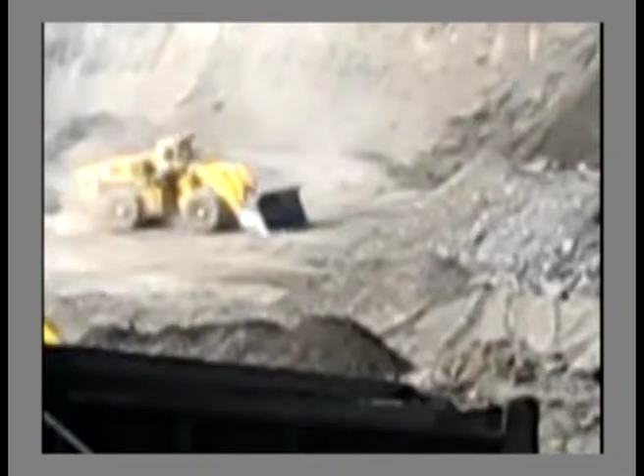Module 1. Methane is a gas formed as a part of the process of coal formation. When coal is mined, methane is released from the coal seam and the surrounding disturbed rock strata. Methane can also be released as a result of natural erosion or faulting. The methane content in coal seam generally increases the deeper the seam exists and also with its age.

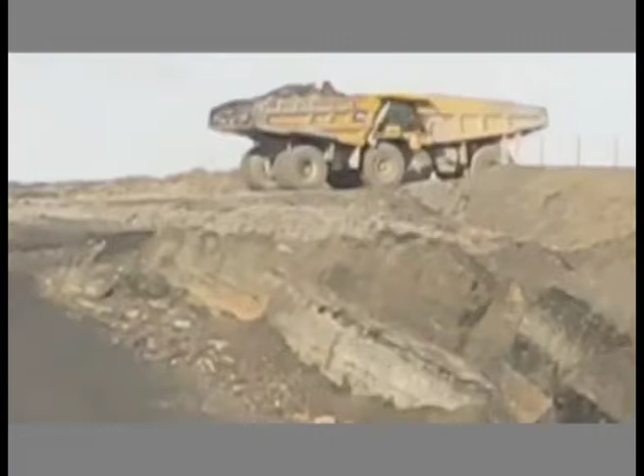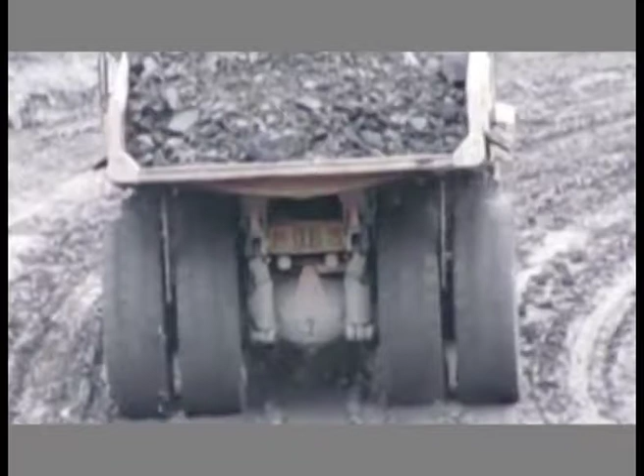As the depth of the coal seam increases, so does the pressure level. This in turn reduces the level of permeability, causing methane to be much more tightly bound to the coal and surrounding rock strata. Underground mining can therefore produce substantially greater levels of methane than surface mining. In fact, underground mines account for the overwhelming majority, up to 90%, of all methane emissions from the coal sector.

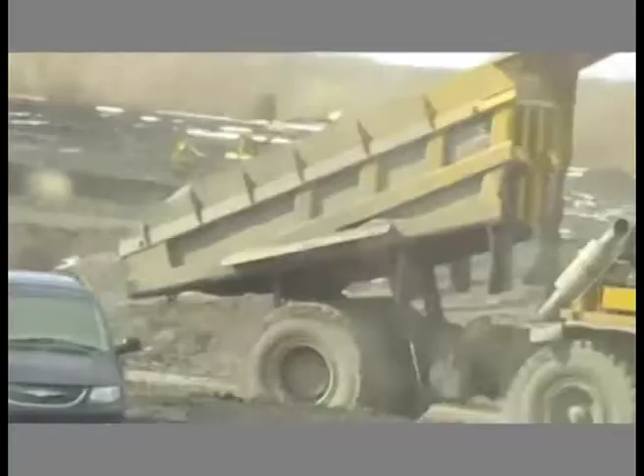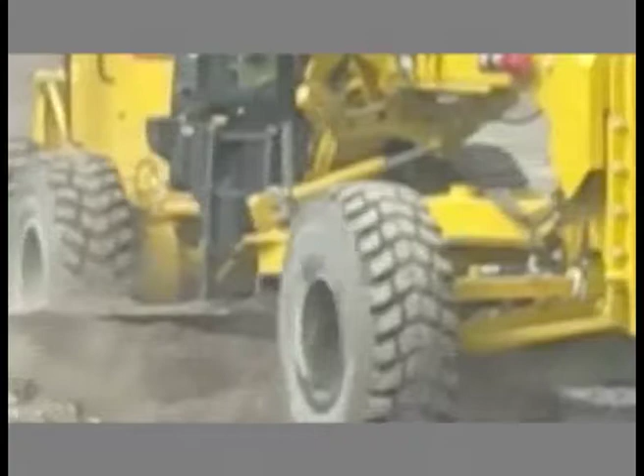When coal is mined underground, this methane not only becomes a potent source of pollution and accident by way of explosions, but also it adds to the ventilation cost. Furthermore, it adds to the volume and quantity of GHG, that is greenhouse gases, when exhausted from the underground into the surface atmosphere.

Thermal power plants are the single largest stationary source of pollution in any country. The toxins these coal-fired power plants produce cause severe damage to both human health and the environment. This in turn lowers the quality of life. Additionally, it also exerts severe adverse impacts on the wildlife, aquatic life, plants and trees, etc.

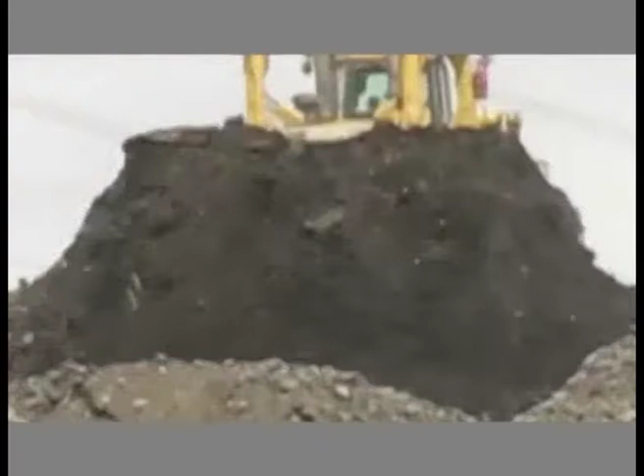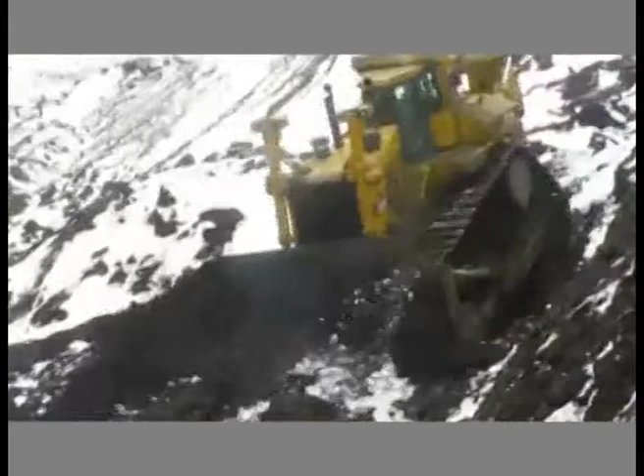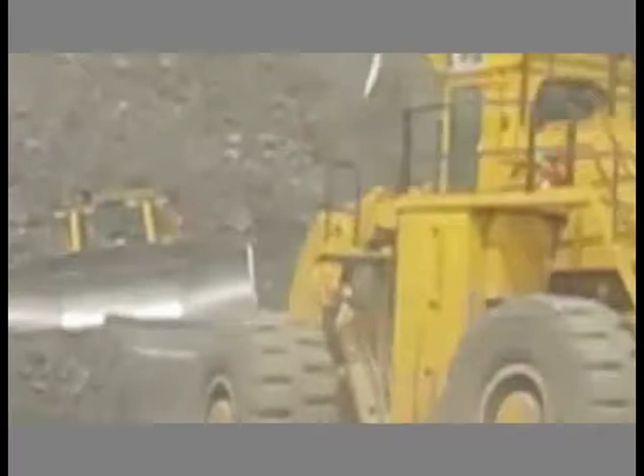Besides carbon dioxide, other major ingredients in the polluted air due to coal burning include sulfur dioxide, nitrogen oxide, carbon monoxide and fly ash. Given this, the mining as well as burning of coal are increasingly gaining the attention of all concerned, not only as a prime energy resource, but also because of a host of environmental challenges offered due to the mining and burning of coal.

Module 2. This module consists of description of the atmospheric impact of the gases and fly ash. Let us discuss the impacts one by one. To start with, sulfur dioxide, SO2. Sulfur dioxide is emitted during burning coal and other fossil fuels, of course.

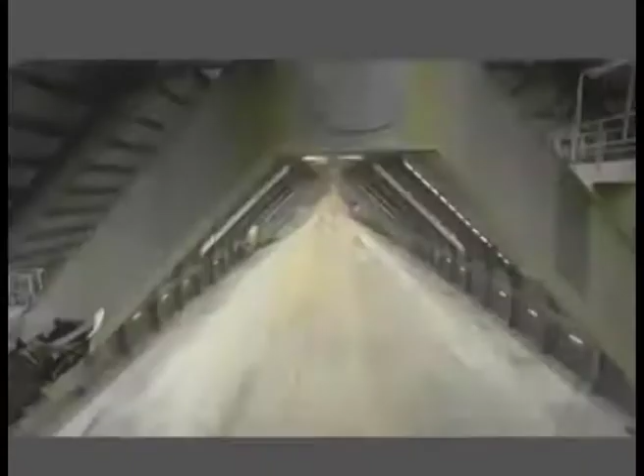While burning, the coal converts into acid gases, that is sulfuric gases, and sulfur particulate matter. These gases and particulate matter are emitted in the atmosphere. It is a major causation of acid rains, as will be described later. The health effects of these emissions on human beings include airway irritation, heart rhythm destabilization, asthma attacks, etc.

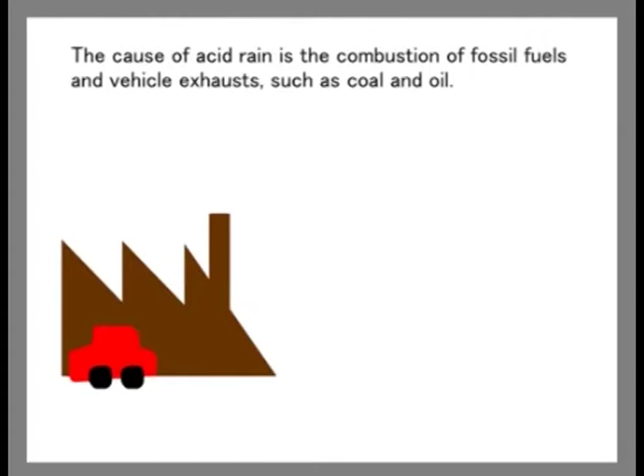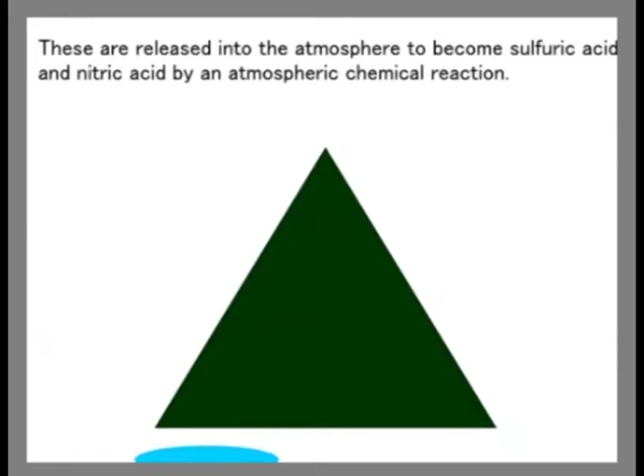Number 2 is nitrogen oxide, popularly known as NOx. It is a main ingredient in acid rain and ozone smog. Acid rain. Acid rain or acid deposition occurs when sulfur dioxide and nitrogen oxide react with water and oxygen in the atmosphere to form acidic compounds, most commonly sulfuric and nitric acids.

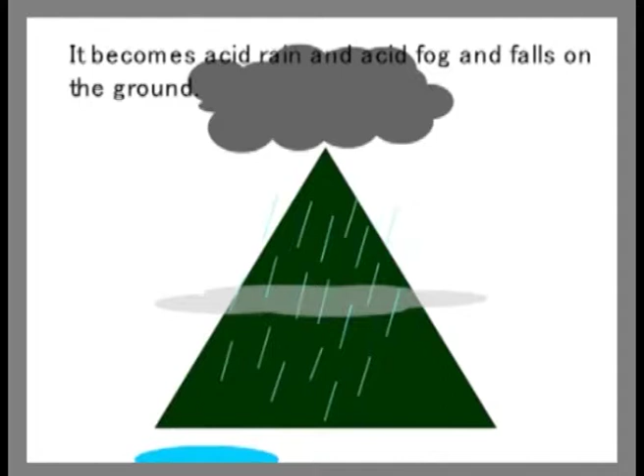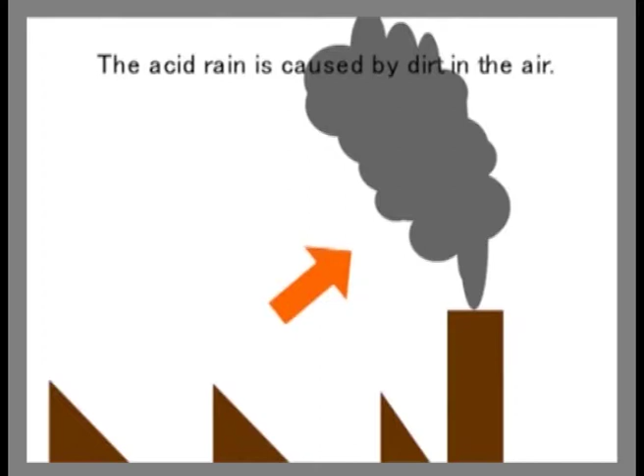These acidic compounds then either mix with natural precipitation and fall to the earth as acid rain, or remain dry and then settle to the ground. Acid rain destroys ecosystems, including streams and lakes, by changing their delicate pH balance, making them unable to support life.

Acid rain can destroy forests, devastate plant and animal lives, and at times it may also adversely affect man-made monuments and buildings to effectively destroy natural and historical treasures.

Number 2 is the ozone smog. The ozone smog is formed at ground level when sunlight mixes with nitrogen oxides and hydrocarbonaceous vapors emitted by power and mining plants. It contributes to airway irritation, coughing, wheezing, asthma attacks and immune suppression.

Number 3 is carbon dioxide. Coal-fired electric power plants comprise the single biggest source of carbon dioxide emissions in the world. Burning of coal releases carbon dioxide in the atmosphere, and it is needless to reaffirm that carbon dioxide is the largest source of greenhouse gases, GHG, in the world. Currently, there is almost 30% more carbon dioxide in the atmosphere than at the commencement of the Industrial Revolution.

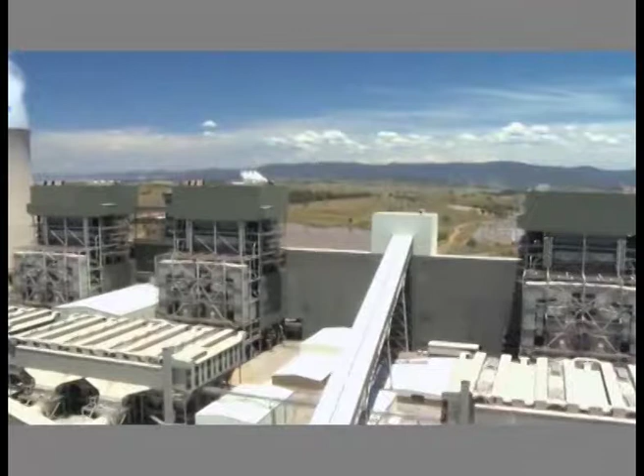Furthermore, we are well on the way to doubling the carbon dioxide level in the atmosphere during this century itself. However, coal-fired power plants have the highest output rate of carbon dioxide per unit of electricity among all fossil fuels. Figure 1 will illustrate the release of carbon dioxide to the atmosphere by various sources and also its safe disposal sites.

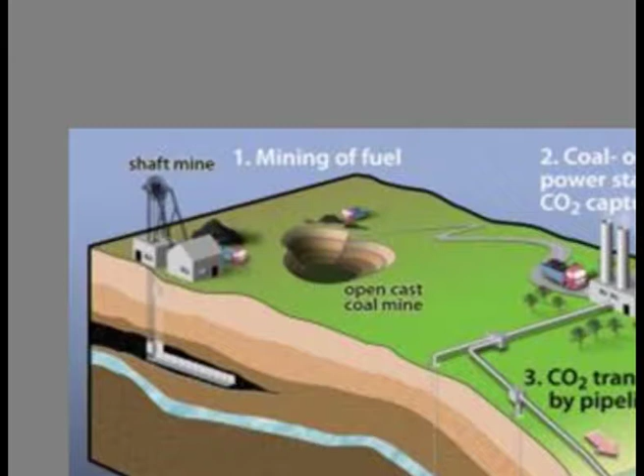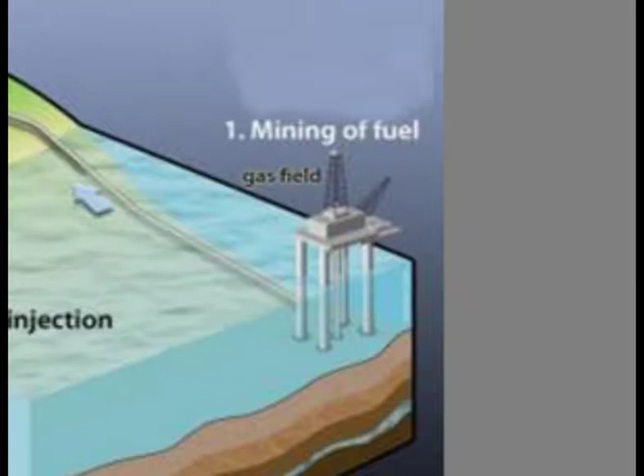The figure illustrates a mining shaft mining coal from the underground deposit. Then there is an open cast mine with coal lying beneath the surface of earth, and thereafter you can also see the mining of fuel offshore. All these three units mine fossil fuels and transport them to a coal or gas fired power plant, which delivers carbon dioxide to the atmosphere.

If it is delivering carbon dioxide to the atmosphere, it will be dangerous because, as already explained, carbon dioxide is a greenhouse gas. So we need to capture this gas at the plant and dispose of it at safe sites.

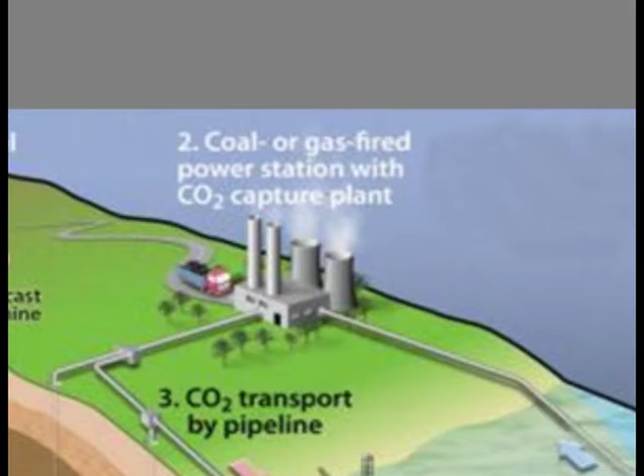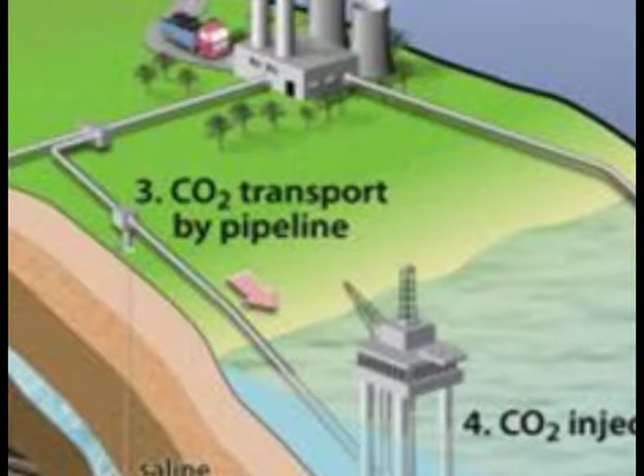As illustrated in the figure, a pipeline brings the carbon dioxide captured at the thermal power plant or gas fired power station. It is transmitted through the pipeline into unminable coal seams, saline aquifers, and also depleted oil and gas fields.

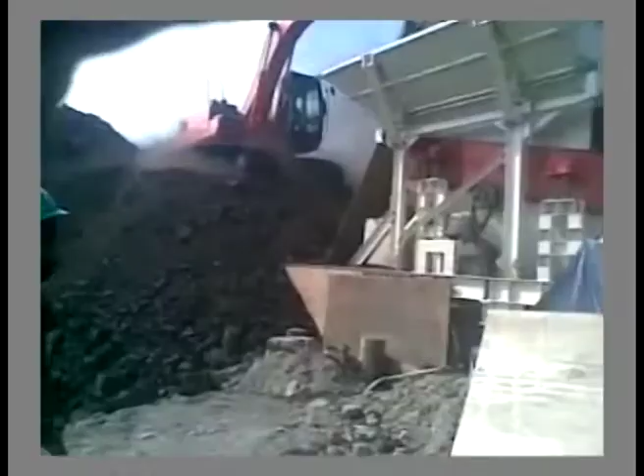Number 2 is fly ash. Fly ash primarily comes from coal fired electricity generating power plants, which grind coal to powder fineness before it is burnt. Fly ash, the mineral residue produced by burning coal, is captured from the power plant's exhaust and collected for use. It is a fine glass powder recovered from the gases of burning coal during electricity production. These micron sized earth elements consist primarily of silica, alumina and iron.

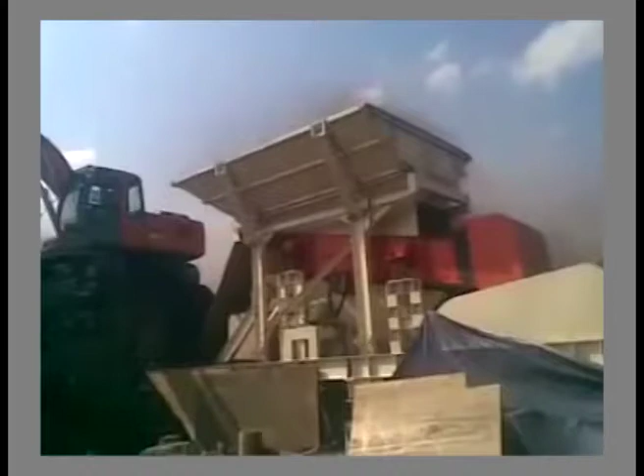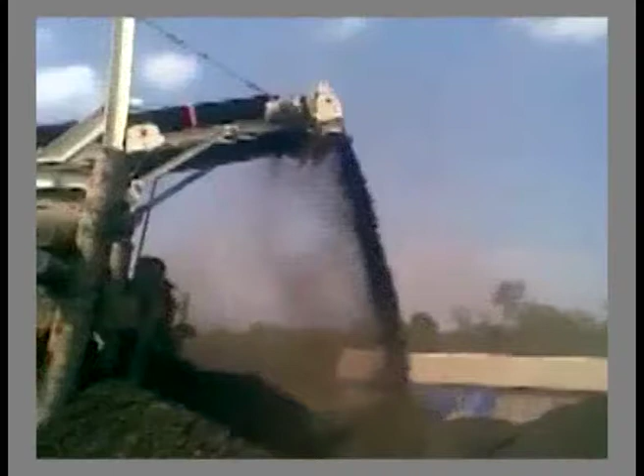Coal fired power plants using pulverized coal or lignite as fuel generate large quantities of fly ash as a byproduct, with the increase in commissioning of several super thermal power plants with large capacity, and with the increasing use of low grade coal with high ash content. The amount of ash generation from them is increasing at exponential rates. This poses serious ecological problems.

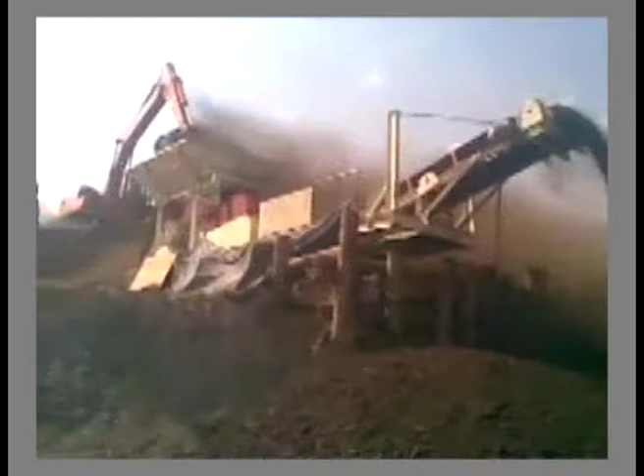Most of the ash generated from power plants is disposed of in the vicinity of the plant as waste material, covering several hectares of valuable land. Looking at the nuisances posed by fly ash, there is an emergent need for its safe disposal and effective utilization. The properties of fly ash depend on several variables such as coal source, degree of pulverization, design of boiler units, loading and firing conditions, handling and storage methods, etc.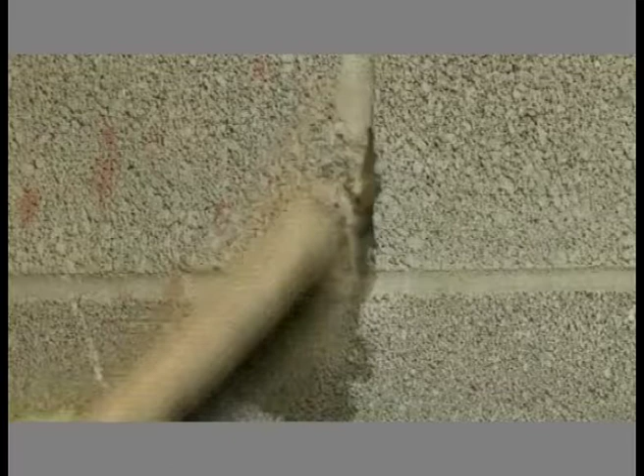In an industrial context, fly ash usually refers to ash produced during combustion of coal. It includes substantial amounts of silicon dioxide, both amorphous and crystalline, and calcium oxide. In earlier times, fly ash was generally released into the atmosphere, but pollution control equipment mandated in recent decades requires its capture. The fly ash is generally stored at coal power plants or placed in landfills. It is often used as a pozzolan to produce hydraulic cement or hydraulic plaster, or as a partial replacement of Portland cement in concrete production.

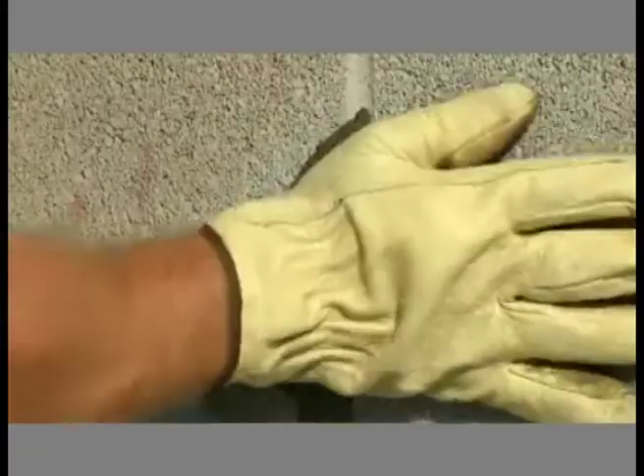At present in India, the focus is on demonstration of coal ash utilization technologies such as fly ash characterization, agricultural related studies and applications, construction of ash ponds and dams, roads and embankments, and reclamation of ash ponds for human settlement, underground mine fills, etc. Only a small quantity of the total ash produced is utilized in concrete brick making, soil stabilization treatment, etc. The bulk utilization of ash is yet to begin in the fullest swing.

Number 3, remedial measures. What are the remedial measures to overcome the challenges posed to atmospheric conditions by these gases? Let us discuss one by one each gas and how to overcome the threats posed by them.

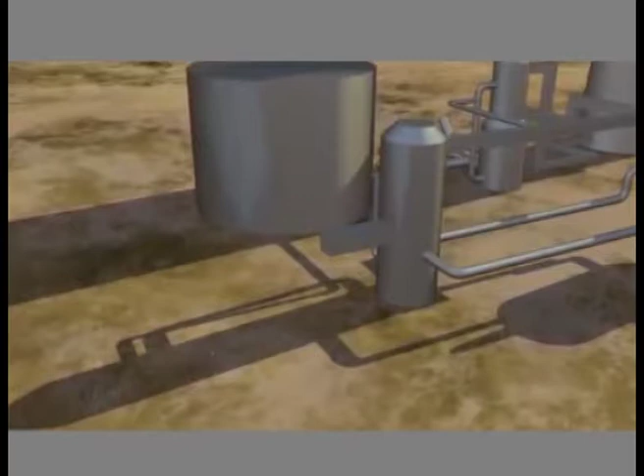Number 1 is sulfur dioxide. Flue gas desulfurization (FGD) systems are used to remove sulfur dioxide. Wet scrubbers are the most widespread method and can be up to 99% effective. A mixture of limestone and water is sprayed over the flue gas.

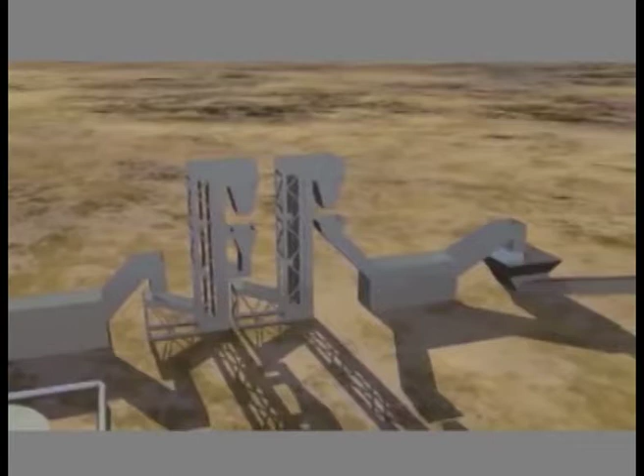Flue gas is the gas which is exhausted from the power plants. This flue gas is mixed with a mixture that reacts with the sulfur dioxide to form gypsum, a calcium sulphate, which is removed and used in the construction industry.

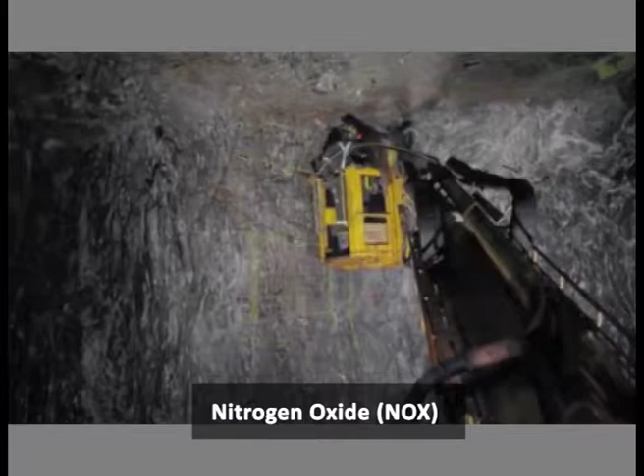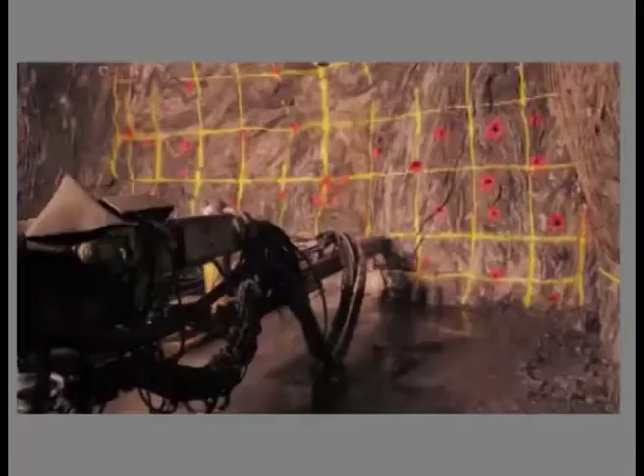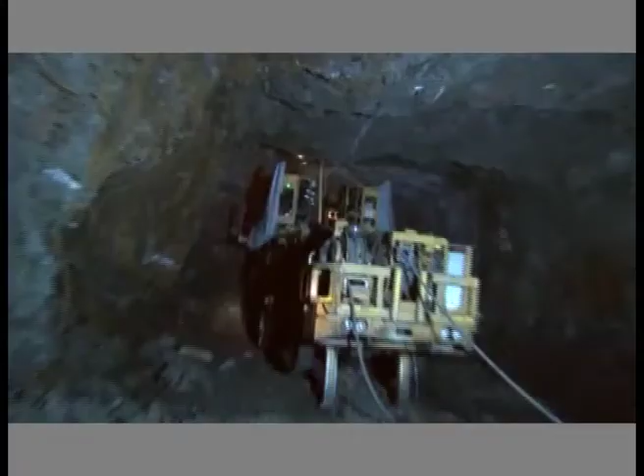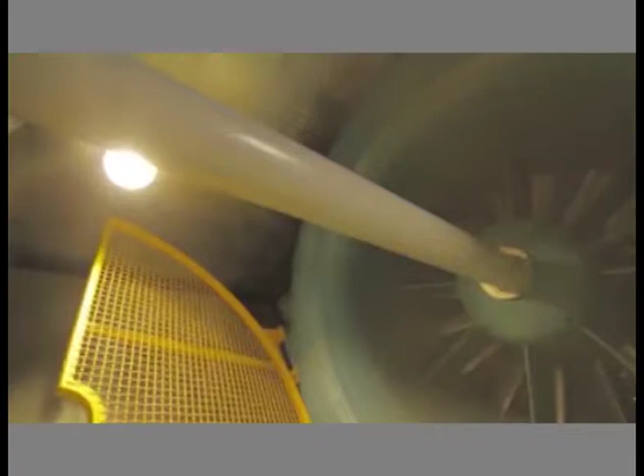Next is nitrogen oxide, NOx. NOx reduction methods include the use of low NOx burners. These specially designed burners restrict the amount of oxygen available in the hottest part of the combustion chamber where the coal is burnt. This minimizes the formation of the gas and requires less post combustion treatment. NOx burners reduce NOx emission by 40%. Further, reburning reduces it to almost 70%, followed by selective catalytic reduction to finally clean the flue gases from NOx up to 90%.

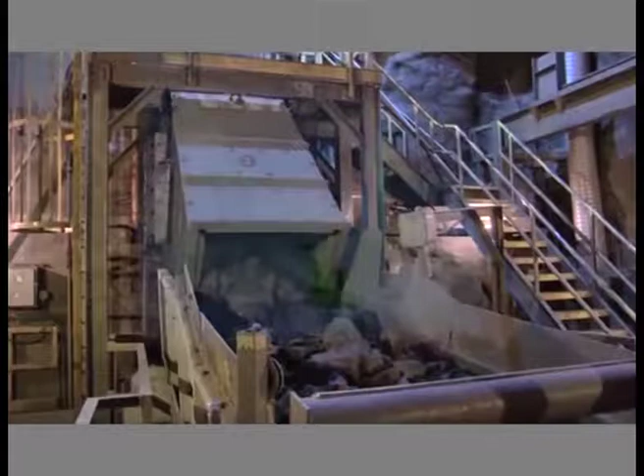Next is particulate emissions, and how do we overcome the problems posed by them. Electrostatic precipitators can remove more than 99% of particulates from the flue gas. The system works by creating an electrical field to create a charge on particles which are then attracted by collection plates. Other removal methods include fabric filters and wet particulate scrubbers. Electrostatic precipitators in conjunction with fabric filters are capable of removing almost 100% of fly ash from the gases. Also, coal washing reduces emission of ash and sulfur dioxide.

Now we discuss the innovative clean coal technologies which are coming up very fast in order to clean these gases and provide alternative technologies which may remediate them. First is sequestration. Sequestration refers to capture and disposal of liquid carbon dioxide into deep geological strata.

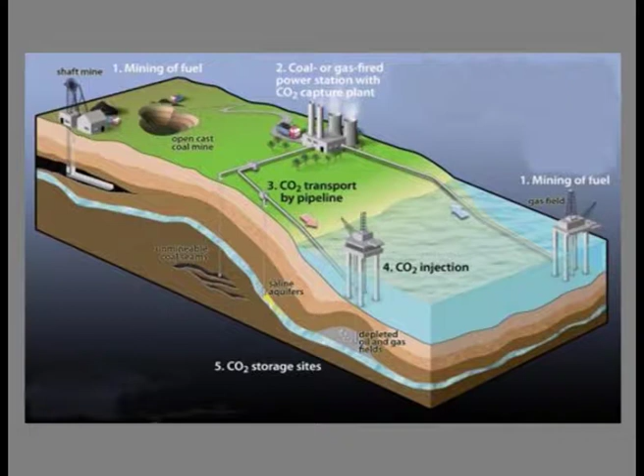The potential disposal sites are depleted oil and gas fields, unminable coal seams, and deep saline aquifers. It entails the technology of capturing carbon dioxide from the flue gases and storing it in deep saline aquifers. It can also serve the oil and gas industry for enhanced oil and gas recovery from oil wells. This comes under the domain of carbon capture and storage, known as CCS.

Researchers have lately explained certain risk factors associated with sequestration. The technique may render the rocks very weak and poses the threat of sudden eruption in disastrously large volume. For effective sequestration, rock should be permeable and very strong.

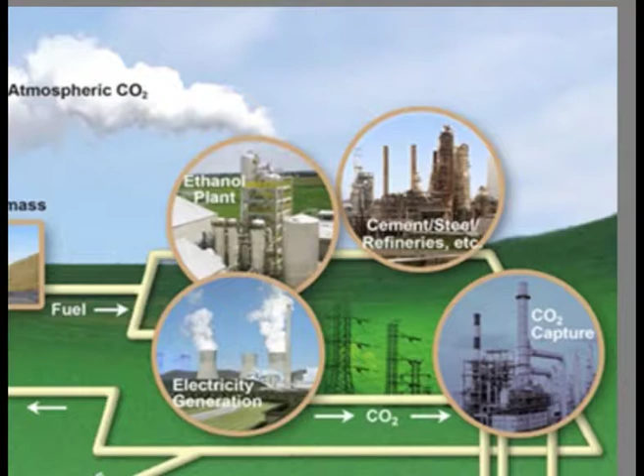Figure 2 shows the carbon dioxide capture and sequestration. In this figure, we can see that coal or any other biomass or fossil fuel is being sent to industry for electricity generation, cement, steel refineries, etc., and ethanol plants. All of these industries generate huge amounts of atmospheric carbon dioxide.

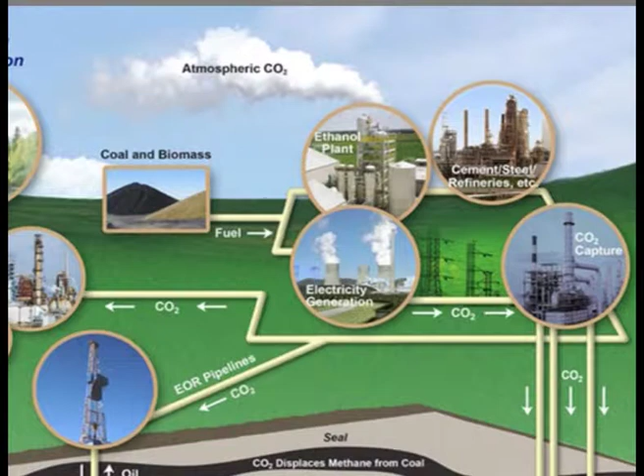Now, a small amount of this atmospheric carbon dioxide is subjected to terrestrial sequestration by vegetation. However, a large amount of carbon dioxide, if released into the atmosphere, will be a challenge. So this carbon dioxide capture plant has to capture the carbon dioxide and also dispose of it safely. So what are the disposal sites?

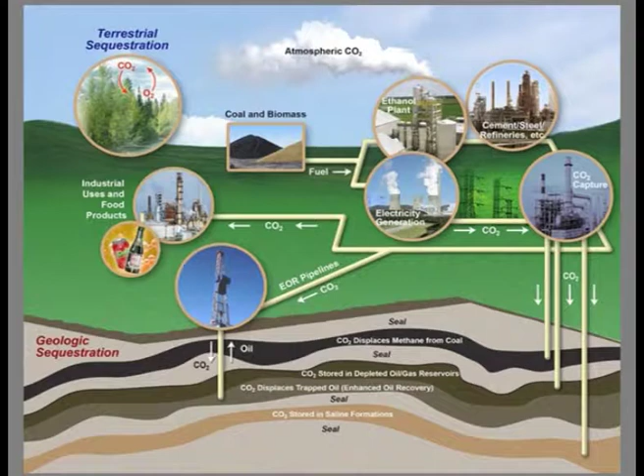These disposal sites are also shown in the figure. Some industrial units may require carbon dioxide, so a portion of the captured carbon dioxide can be sent for industrial uses and the food product industry, etc. Another part of the carbon dioxide has been shown to be sequestered.

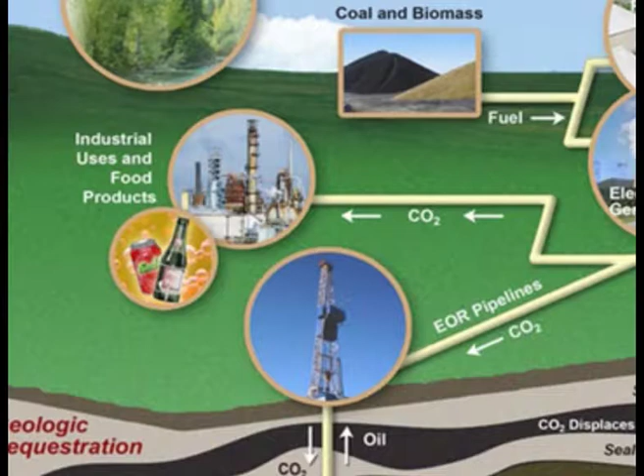This sequestered carbon dioxide can raise oil from depleted oil wells, known as enhanced oil recovery. So sequestration can be positively used for the enhancement of oil recovery. Another part of the carbon dioxide can be used for displacing methane from the coal seam, a method known as enhanced coal bed methane recovery.

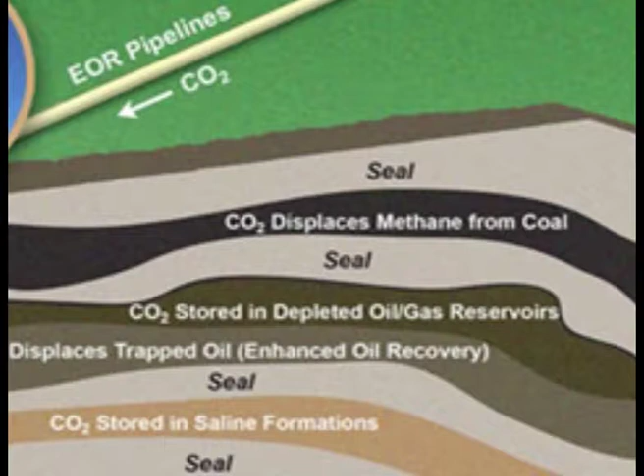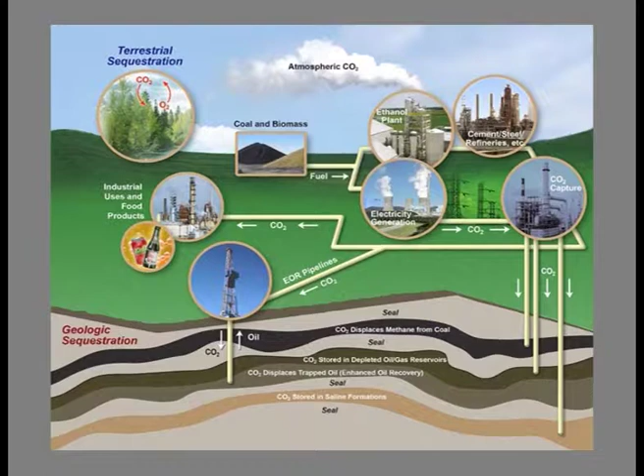And still, the carbon dioxide can be stored inside deep saline formations, also known as deep saline aquifers. So these are the possible sequestration sites for the captured carbon dioxide.

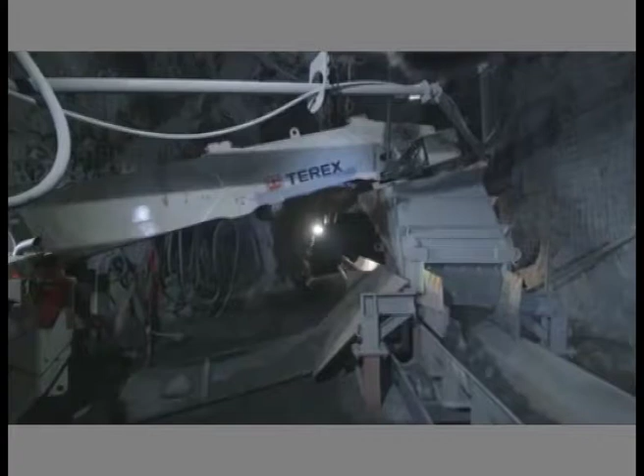The next technology is underground coal gasification, which implies conversion of coal into gas with or without entering the coal seam, by mining and non-mining methods. The gas can be sent by pipelines to industrial units for energy generation. The non-mining method, as illustrated in figure 3, gains prevalence because it eliminates drilling, blasting, cutting, loading, supporting and transporting costs. It is very environment friendly since it entails minimum land, water, air and ecological pollution.

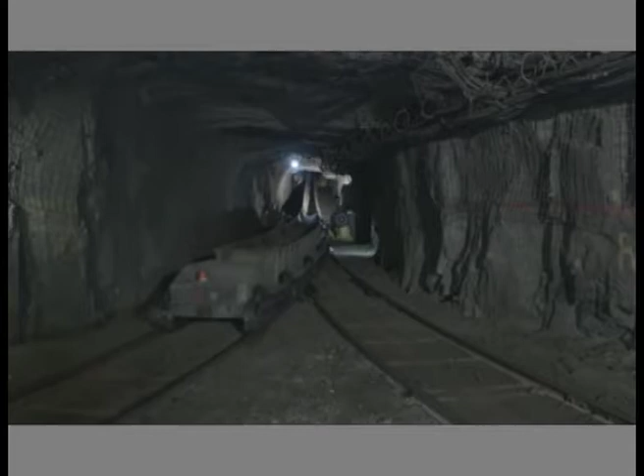This method is, however, very restrictive in nature and normally suited for low grade subbituminous and lignite deposits with high hydrogen to carbon ratio, higher volatility, and low coal plasticity.

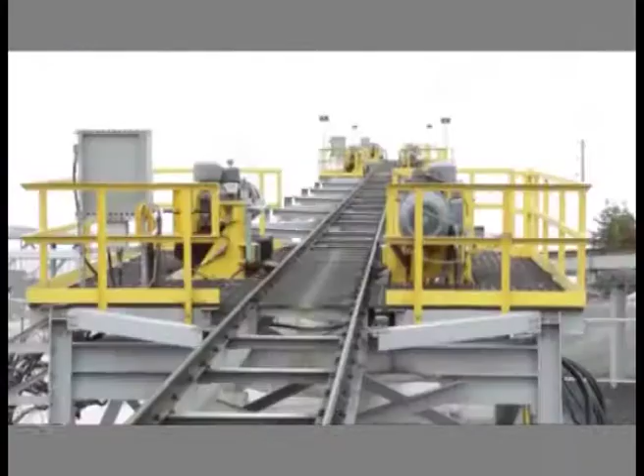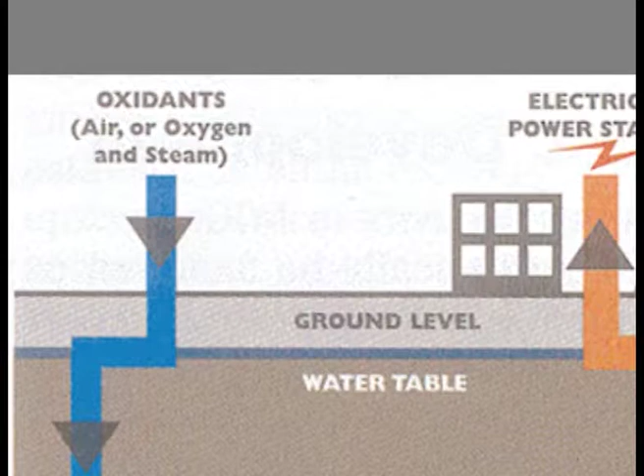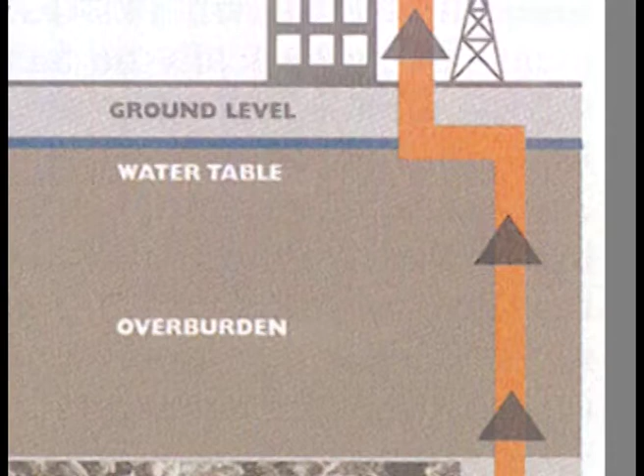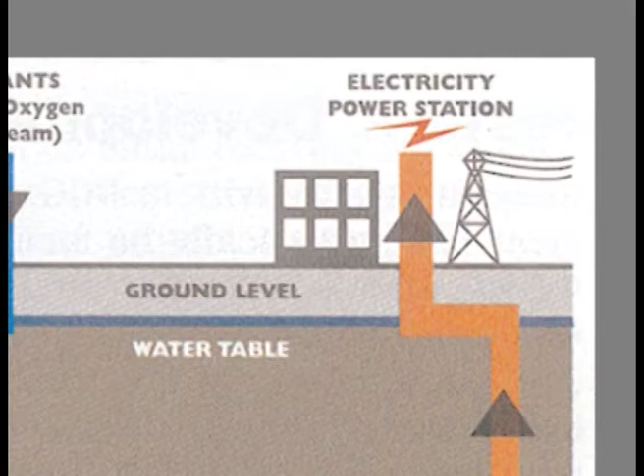Figure 3 shows the non-mining method of underground coal gasification, wherein you can see the injection well and the gas offtake well. Air, oxygen, or air enriched with oxygen, or hot steam can be sent through the injection well. It will oxidize the coal in a controlled manner, and the gas would be formed as the coal is converted into gas. This gas can be brought out to the surface from the offtake well and used directly without cutting or breaking of the coal. That is the technique of gasification, where we convert coal directly into gas without using any drilling, blasting, or transportation of coal.

Next is coal bed methane extraction, which is gaining popularity nowadays in our country as well. A range of technologies are available to recover methane from coal, and these can be broken down into three categories. Number one is coal bed methane extraction, where methane is recovered from unmined coal seams. The coal seams may be mined in the future, but this is largely dependent upon geological factors such as coal depth and quality.

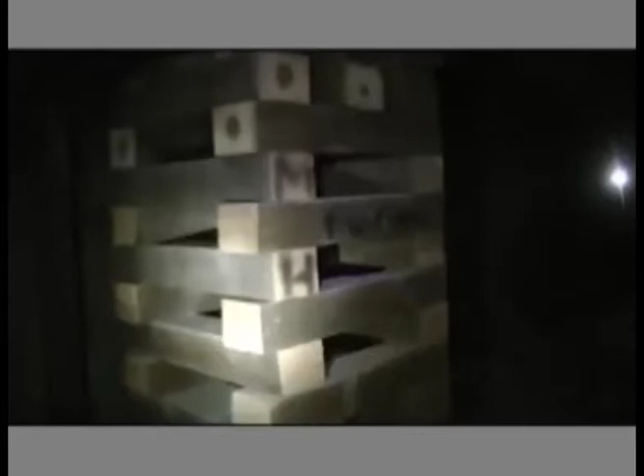Number two is abandoned mine methane, AMM. Methane recovered from mines that have been abandoned following the completion of mining operations. Significant amounts of methane may remain trapped in the mine or may continue to be emitted from the openings. This methane has to be tapped, and this is known as abandoned mine methane. Number three is coal mine methane, CMM. Methane is recovered during mining activities as the coal is in the process of being extracted, thus emitting significant quantities of the gas.

Next is coal liquefaction. This technique is used to convert coal into oil. Successful trials were made in Germany and then in Africa. However, commercial viability is still not ascertained. Specific liquefaction technologies generally fall into two categories: direct liquefaction, DCL, and indirect liquefaction, ICL.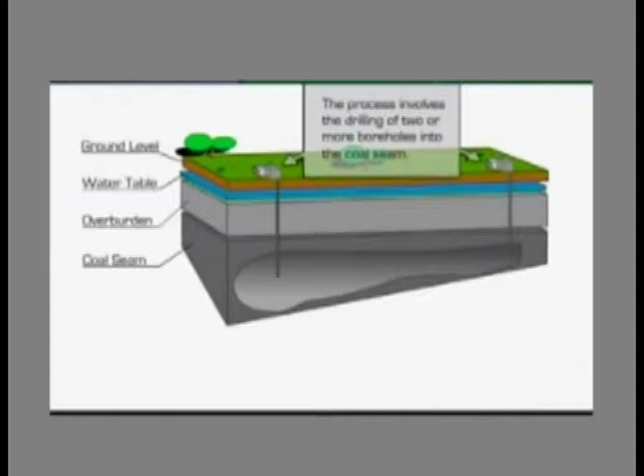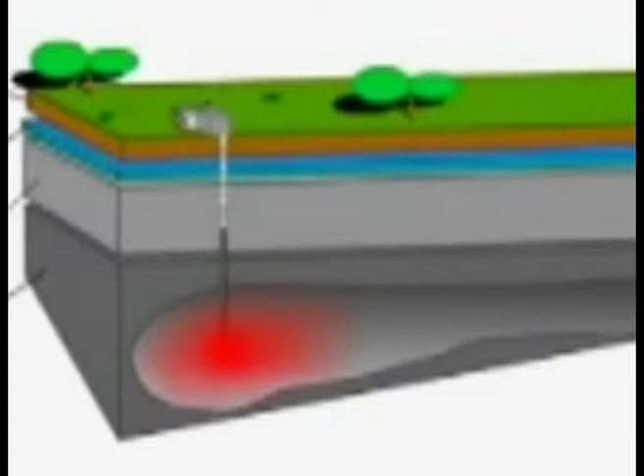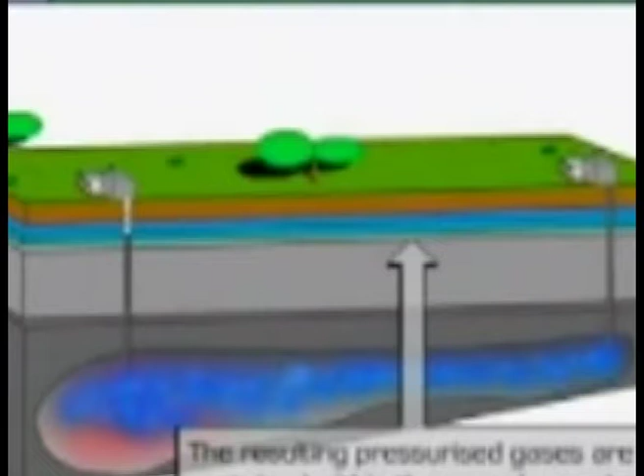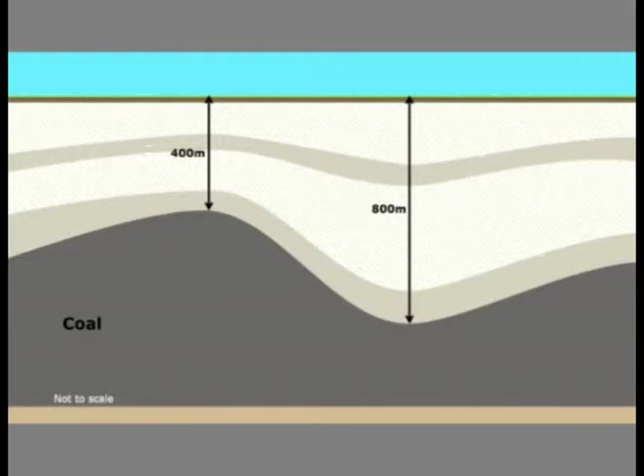Indirect liquefaction processes generally involve gasification of coal into a mixture of carbon monoxide and hydrogen, popularly known as syngas, and then using a process such as Fischer-Tropsch to convert the syngas mixture into liquid hydrocarbons. In contrast, direct liquefaction processes convert coal into liquids directly without the intermediate step of gasification, by breaking down its organic structure with application of solvents or catalysts in a high pressure and temperature environment.

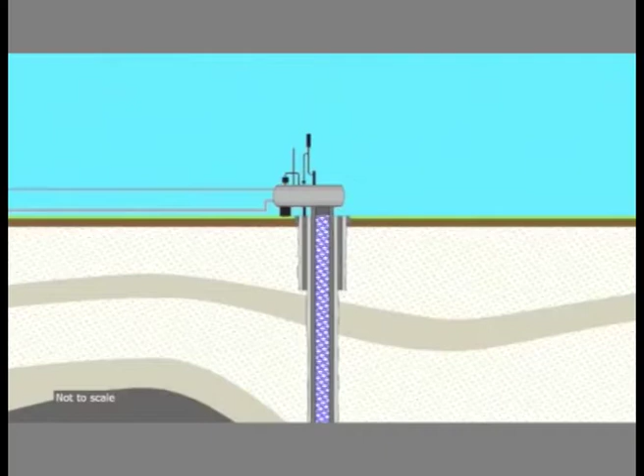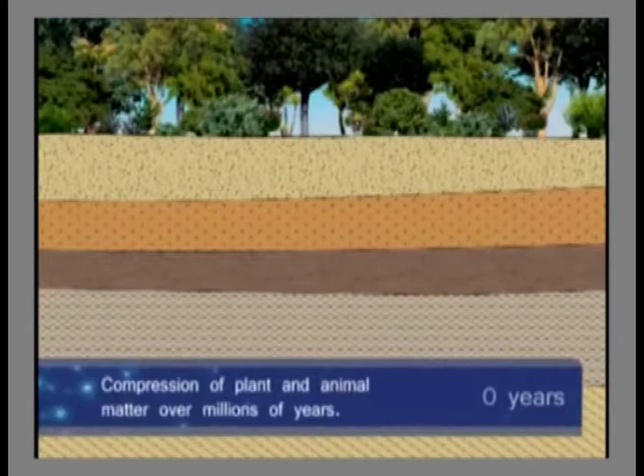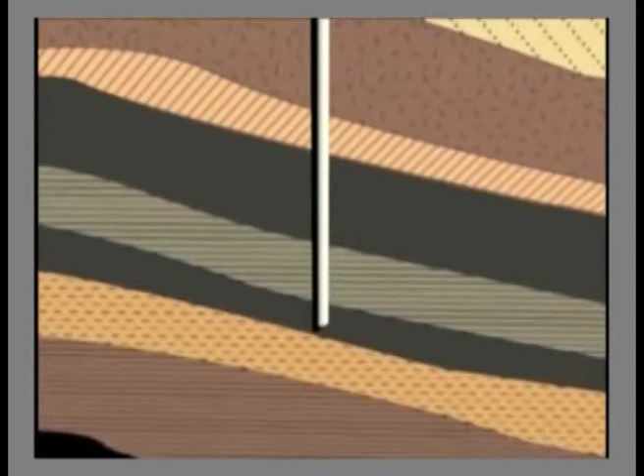Most coal liquefaction processes are associated with significant carbon dioxide emissions resulting from the requirement of heat and electricity. However, synthetic fuels produced by the coal liquefaction process tend to be cleaner than naturally occurring crudes, as heteroatom compounds, for example sulfur, are not synthesized or are excluded from the final product.

So here is the time for the conclusion, and let me conclude. Following are the main conclusions which may be drawn from the present work. Number one, coal is an absolutely important fossil fuel which occupies the center stage of global natural energy resources. Coal and the coal mining industry worldwide shall retain its supremacy in energy generation and other industrial applications in future for almost 150 years.

As for now, number two, a host of atmospheric challenges are brought forward by coal mining because of release of entrapped methane during mining, and release of carbon dioxide, sulfur dioxide, nitrogen oxide (NOx), and fly ash during the burning of coal in thermal power plants.

Number three, to combat these challenges, the need for emerging and innovative technologies is very important vis-a-vis the global concern on environment and climate change. Number four, innovative technologies offer great potential in combating the deleterious impact of sulfur dioxide, nitrogen oxide, fly ash, and particulate matter. Number five, the role of emerging sequestration techniques for carbon capture and storage, enhanced CBM extraction, and enhanced oil recovery may be promising.